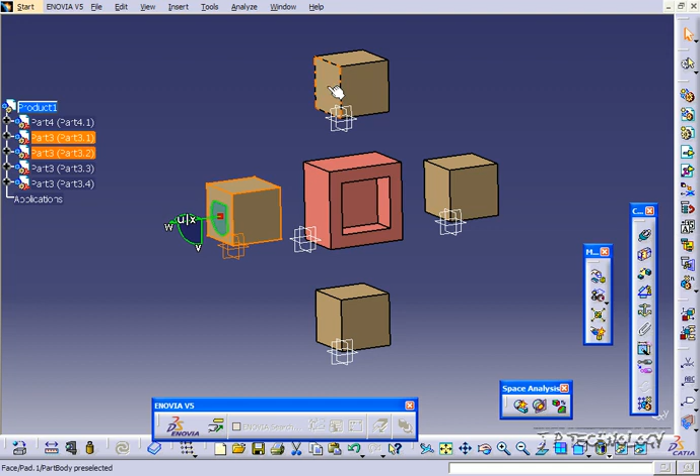Remember, double click and find out which part it is down the tree before you click to move, because if you click, all of them are going to move. So click the one you want. Now let's double click on it, and we want it to move 200 along W. It's at 100 now, so we'll click once, twice, click close, and now it's moved 200. So now there's a 300 millimeter gap.

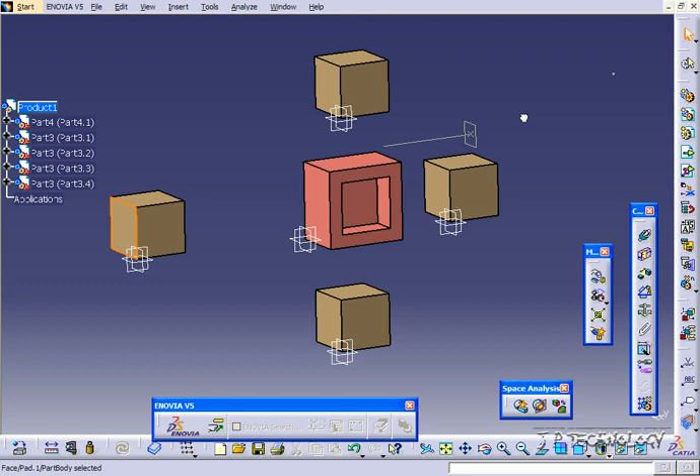Remember, after you finish, always throw the compass back up, because if you leave it there, you're still able to move things around. So drag it away when you're done. Now we'll pull this guy away also, putting it on that face, double click, and this time go negative W and bring it up. Click close, and when you're done, throw it back up. Again, this is just another way to position within your assembly using the compass.

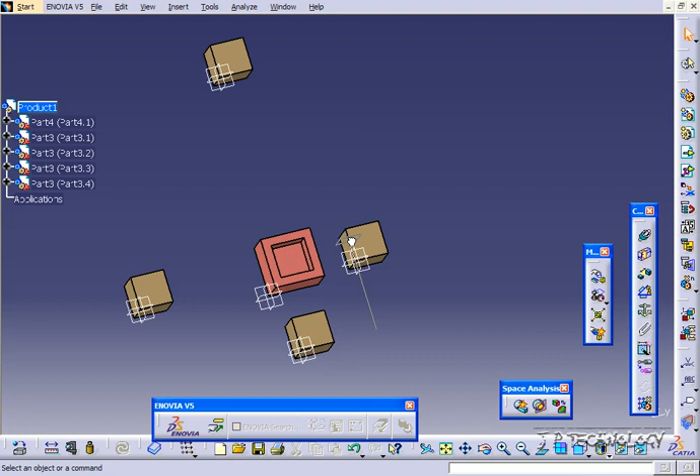Now I'm going to throw it onto an edge, and rotate about that edge. We're going to be rotating about the W. Every time I click, you'll see it rotating, and I'm able to rotate this component. Now I'm going to close it.

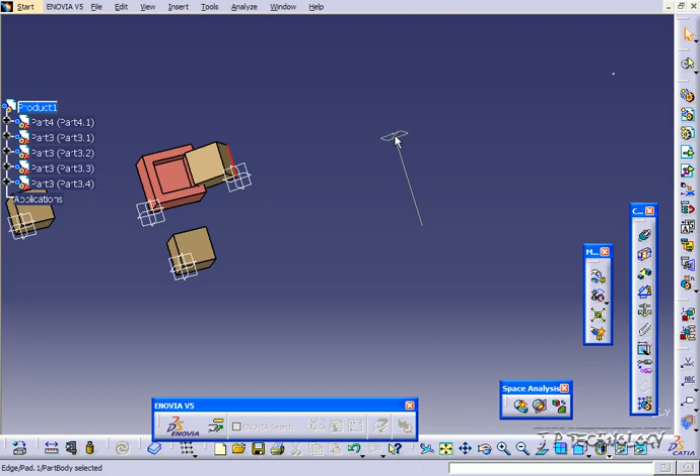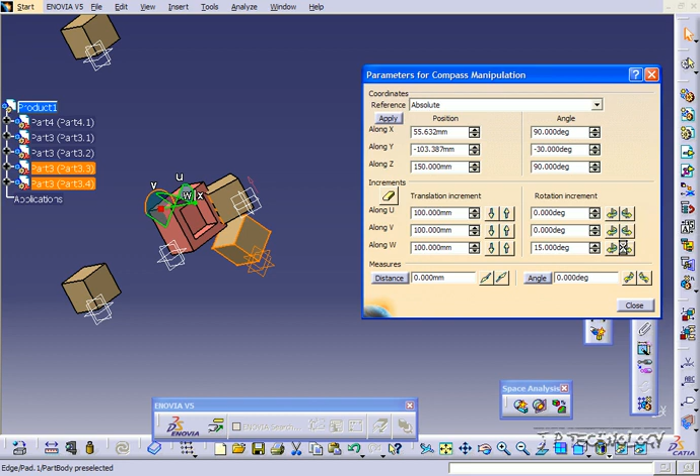Now I'm going to throw the compass onto this edge here to rotate. I'll throw it there, and I'm going to rotate this part. So I'll double click on it and rotate it. As I have it over there, it's a larger rotation radius, so I'm getting a different rotation rather than if I just put it on the same edge. And I'll click close.

By using the compass, it's just like using some of these constraints, like your offset or angle constraint. The only difference is that you don't get a little subsection on the side from your constraints tallying what's been done, letting you go back and change it. So the downside with using the compass is that you don't have a running list of what you're doing, but it's a very easy tool to incorporate all these different constraints for moving your components within your assembly.

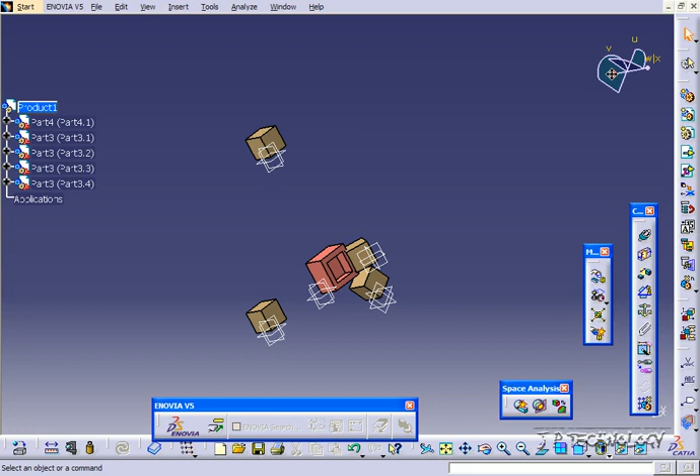Now if we also just throw it on top anywhere and drag it around, you're able to move your assemblies. We'll just click this component here and start dragging and moving them around, so we can rotate them, and we're able to move this guy in any direction and position them.

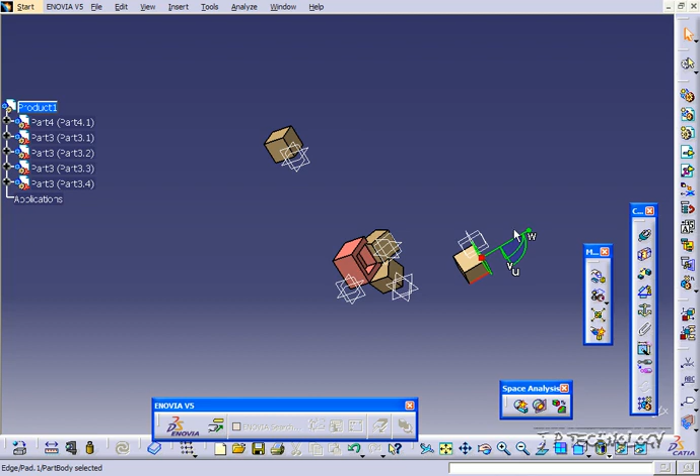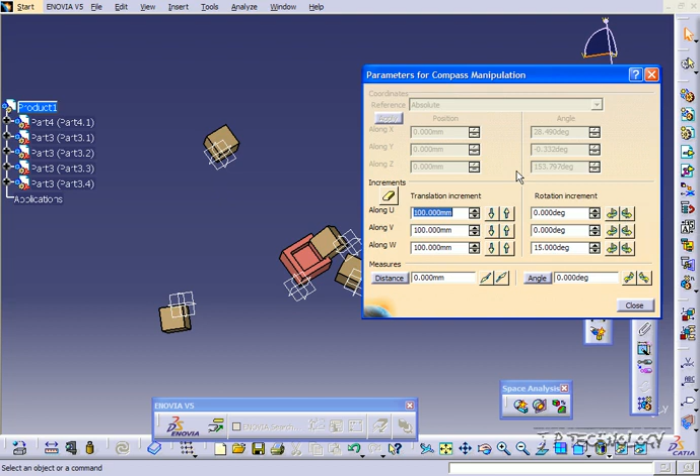So by throwing the compass tree on there, you're able to move around your object freely just by clicking the different axes, planes, and rotation angles. That's another advantage with this, it's a lot easier to move things around rather than using any of these constraints. It works pretty much the same as the manipulation tool, except you're able to hone in, and if you double click on it, it gives you an increment, a solid number, so it's much more accurate than the manipulation tool.

And that concludes our tutorial on compass positioning within Catia V5.